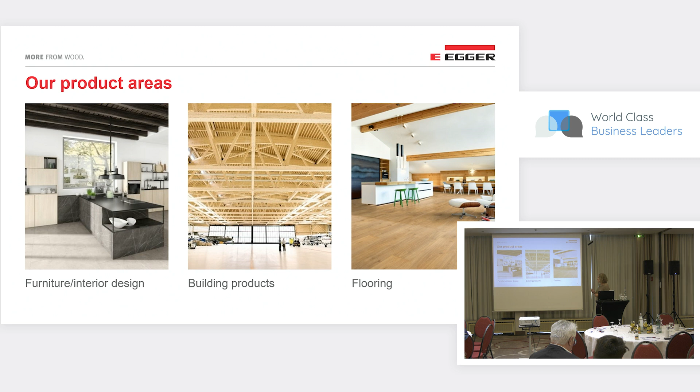Our product areas are furniture and interior design, building products for construction use, and flooring materials. We have various target groups ranging from furniture industry to retail, trade, architecture, to the DIY sector.

And we are not the first family-owned company here at this conference. EGGER is now in third generation, and this year was very exciting for us because we have a generation change when the grandson of the founder has taken the helm in group management.

Our vision is to be the leading brand for wood-based solutions, and I want to show you how our value chain is working, so you get an impression of what it actually means when I talk about wood-based products. So we start with trees in a sustainably managed forest, and those trees are cut in a sawmill into wooden boards.

On the one hand we have those boards, and on the other hand there occur byproducts like wooden chips or sawdust. These byproducts we can kind of bake with the help of a lot of pressure and heat and some glue in very huge presses, into new large format wood-based materials, so-called chipboards or fiber boards or oriented strand boards.

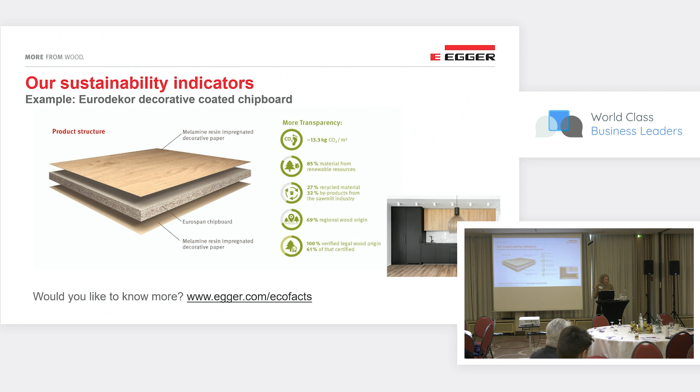When we have a look at our group-wide sustainability performance in the last financial year, we can look into our annual sustainability report. It's a very huge report, about 150 pages.

That's quite impressive, and I think this is a fantastic takeoff point that some other industries might be jealous of. And indeed it is. Handling tons of wood from sustainable forestry has a lot of advantages.

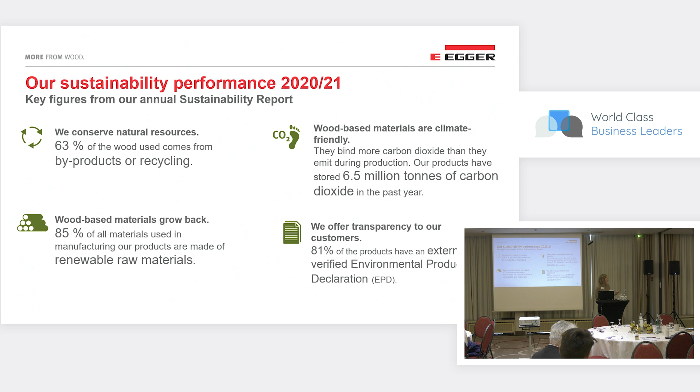I'll show you now why this is important, and I'll start with a very simple example. If you remember yesterday, Kasia from IKEA said they sell simple products. So now I'm talking about a super duper simple product, just to get you into the topic.

So we start with our timber. Timber is 100% wood, just a tree that you cut into boards. So we have material that is 100% renewable, with 0% recycling content, and it has only one component.

But for this simple product, we also have LCA data. We have an EPD, and I'll show you a screenshot of this LCA result table. Actually, this result table is huge, and I just cut out the core indicator for the global warming potential. You can see it has several lines.

In the first line, we find the global warming potential total. For pure wood, it has a very high number with a minus in front. That means it has a negative carbon footprint in the total. The total is the sum of the subcategories you find below. So if you take your calculator and add the other 3 lines together, you will get the total in the first line. The global warming potential total is the sum of the other subcategories.

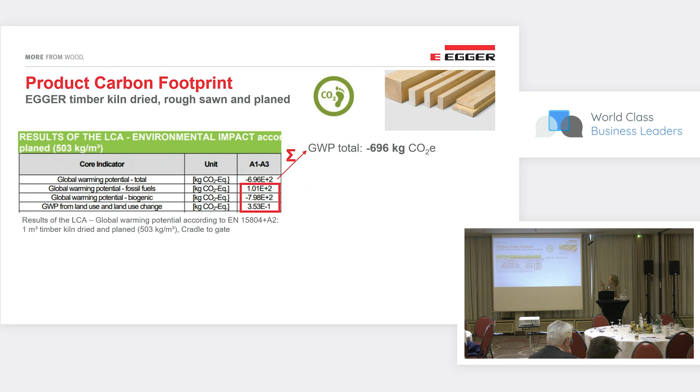But now let's have a closer look at those other subcategories, where we start with the fossil fuels. We have a number of 101 kilogram CO2 in this line. Those emissions occur during harvesting activities, transport activities, the processing in our plant because we dry the wood, and the machines for cutting also use some electricity. So in sum, we have fossil emissions for this natural material of about 100 kilogram per cubic meter.

In the next line, we have biogenic emissions, again a very big negative number, because here, as the plant grows and takes up carbon from the atmosphere, we have a negative emission. That's why we have a lot of negative emission in the biogenic part, due to the uptake by the tree growth.

The last line is about land use and land use change and the emissions that occur there, but they are quite small, and I will ignore them for the rest of this presentation. So we will focus on the global warming potential, which is composed of fossil and biogenic emissions.

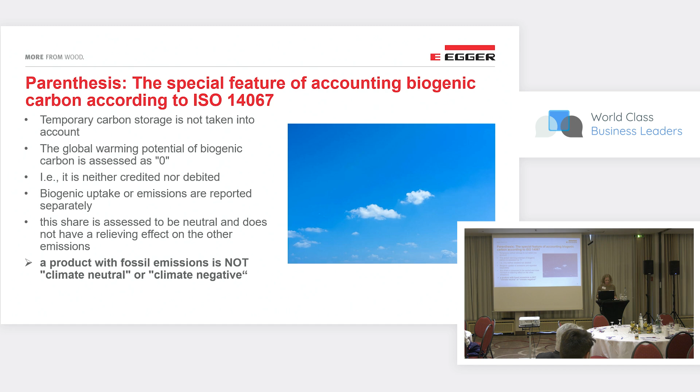And a product with fossil emissions is not climate neutral or climate negative. Now let's switch back to our timber.

With this product, we see 100 kilogram of fossil emissions. Those 100 kilogram enter our customer's scope 3 emissions. So if Hornbach is buying our timber, this is the footprint that enters as a burden into their scope 3 emissions. And on the other hand, we at EGGER know exactly where our homework lies, so we know where we still need to improve our processes on our way to net zero.

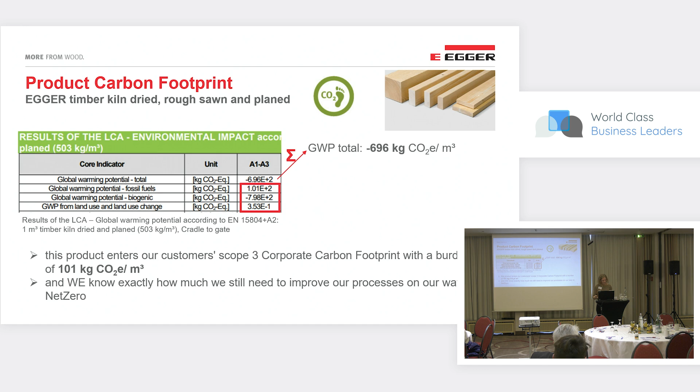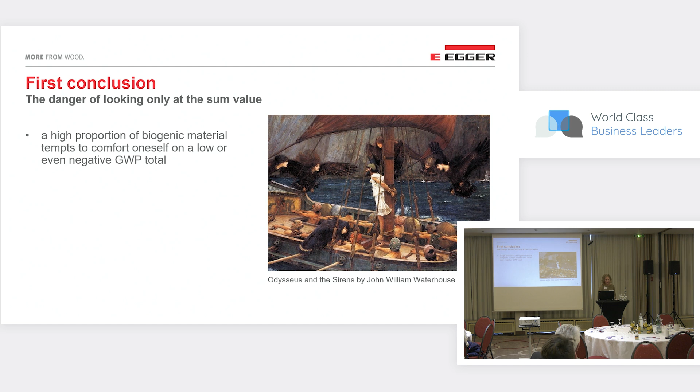So let's come to a first conclusion: the danger of looking only at the sum value. A high proportion of biogenic material tempts one to comfort oneself on a low or even negative global warming potential total. But the risk here is to ignore the fossil emissions and not to address change in our own processes or to foster changes in our supply chains.

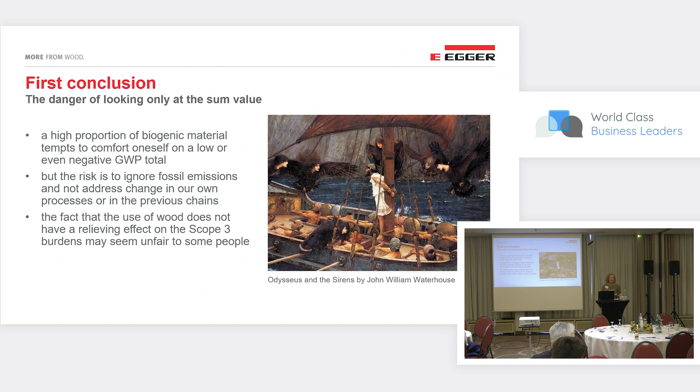The fact that the use of wood does not have a relieving effect on the scope 3 emissions or burdens may seem unfair to some people. They say, why, we are using so much wood? There must be a kind of award for that. And when you say no, it's calculated as zero because it's neutral, and this is good enough. On the other hand, these biogenic emissions that occur in our own biomass plants when we are burning old wood are also not taken into account as an environmental burden because they are not fossil, they are also biogenic.

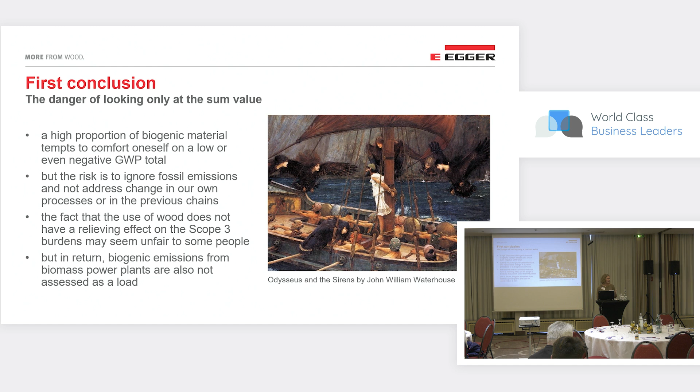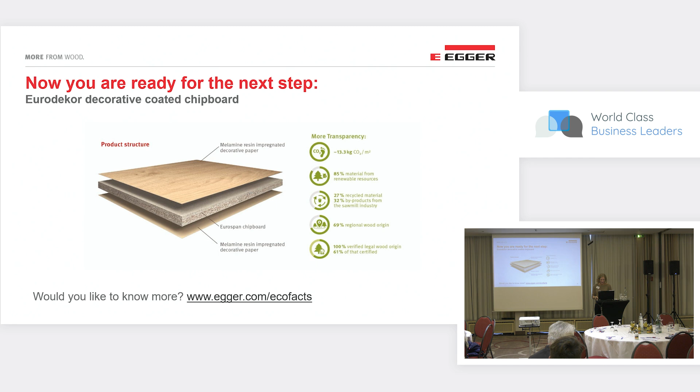So I hope you are now ready for the next step. We come to a product with more than one component. This is our bread and butter business, Eurodekor decorative coated chipboard. It usually is composed of wood, either from fresh wood or from sawmill byproducts, or a high share of post-consumer material.

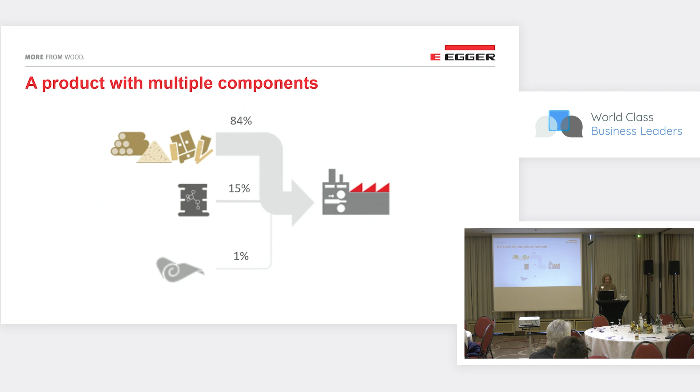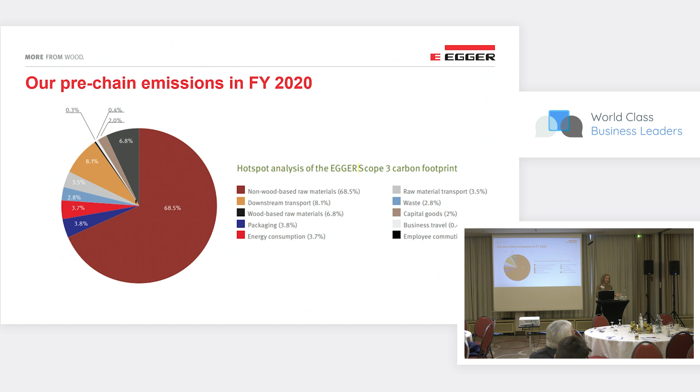This enters at 84%. 15% are fossil-based adhesives, and 1% is the paper used for coating the surface. All those figures are the shares by weight which enter the product. But when we look at our scope 3 emissions, we find that the non-wood materials are responsible for nearly 70% of our emissions in scope 3. And remember, they cause 70% of the emissions, but they enter into the product with only 15%.

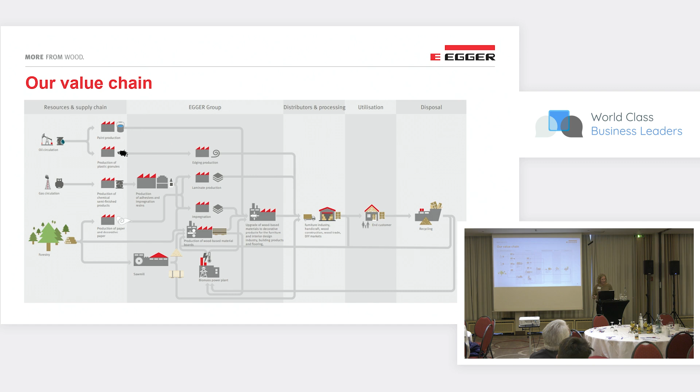So back to our value chain. I talked a lot about wood and how nice wood is, and for the last 20 years the wood industry used it like a kind of soft cushion where we slept, thinking that we are using so much wood and everything is so fine. But since we know our scope 3 emissions, we know that we have to focus on our fossil-based additives.

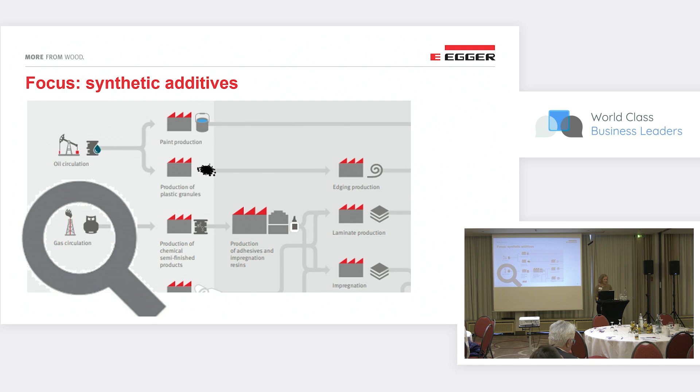And this is because it is the biggest lever for our journey. Of course, we were very curious when one of our suppliers announced having a carbon neutral plant-based product. And of course, we assumed that it would be better, because they said it's carbon neutral, it's plant-based, and we were very curious. But I know that when we use such a product and want to implement it into our carbon footprint calculations, our verifier will ask for proof.

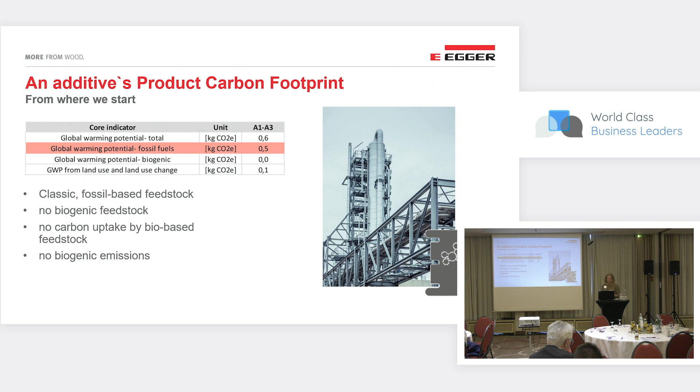And I asked our supplier, what happened? What are you doing? Why do you have more than doubled fossil emissions? Then it turned out that this product was made of biogas. And for the synthesis of this product, they used a lot of energy, and this energy was not regenerative, it was fossil-based. Because they used a lot of energy in this process, you can see the result.

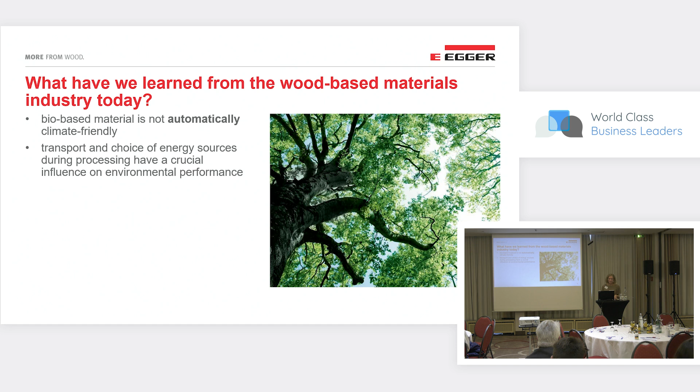So what have we learned from the wood-based materials industry today? Bio-based material is not automatically climate friendly. Of course, mostly it is, but not automatically. The transport and the choice of energy sources during processing have a crucial influence on environmental performance. The declaration of the sum value, global warming potential total, is not sufficient to assess the climate effect of a product. A separate disclosure of biogenic uptake is essential to unmask those fossil emissions.

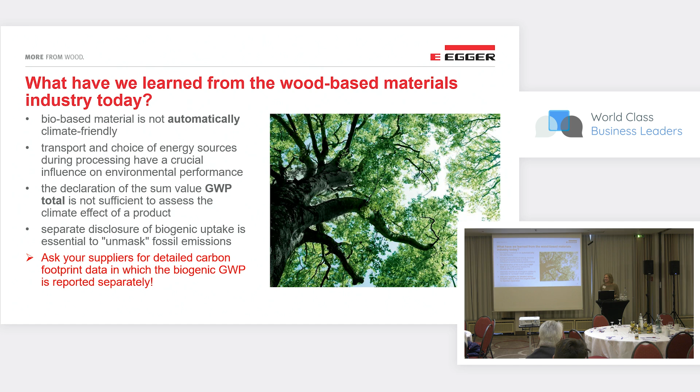So that's why I tell you: go out, ask your suppliers for detailed carbon footprint data in which the global warming potential of the biogenic share is reported separately. So, with this sentence, I want to close my presentation, and I'm looking forward to your questions at the round table.